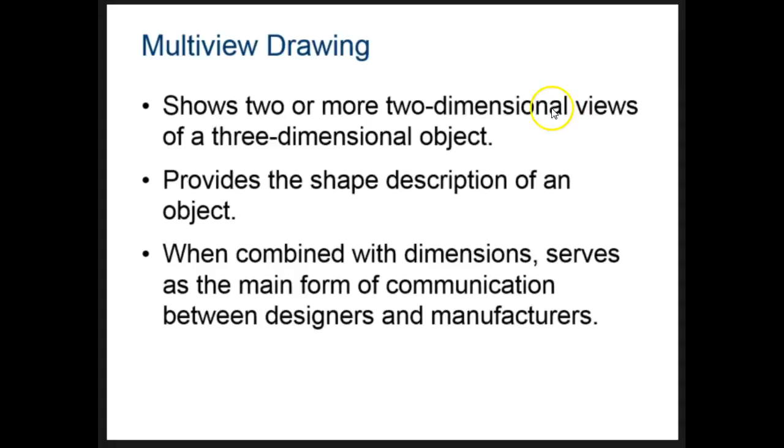This is our video for multi-view sketching, also called orthographic views. Basically, multi-views are showing flat two-dimensional views, like a front view or a top view.

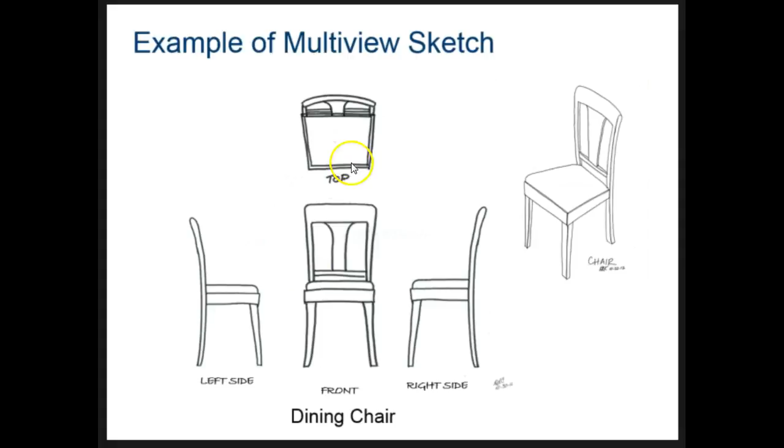Here's an example of a real-life object. This should look like an isometric view to you that we've been working on. These are multi-views: what would the chair look like straight from the front, the top, or a side? One thing I want to point out is, am I learning new information on this side compared to that side? Basically they're just reflections of each other, so I'm not getting any new information. Generally in engineering, we do at most 3 views: front, top, and right side.

So you have a picture that has this on here. This is our isometric view.

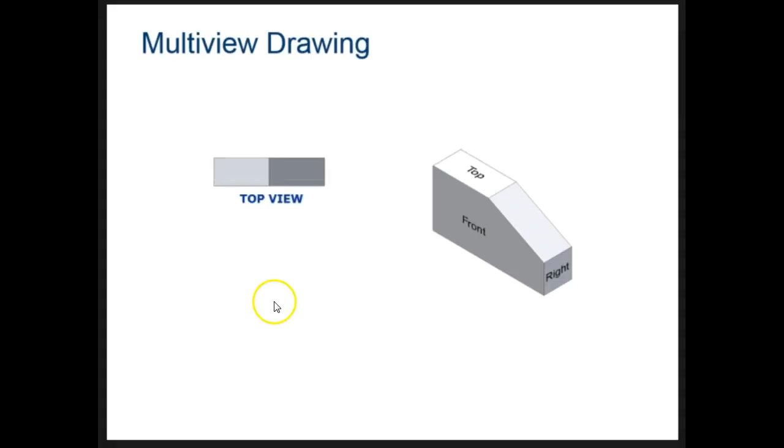This would be where we'd put the top view, and if I take the top view and tilt it down, this is what the front view looks like. If I take the front view and tilt it over, this is what the side view looks like.

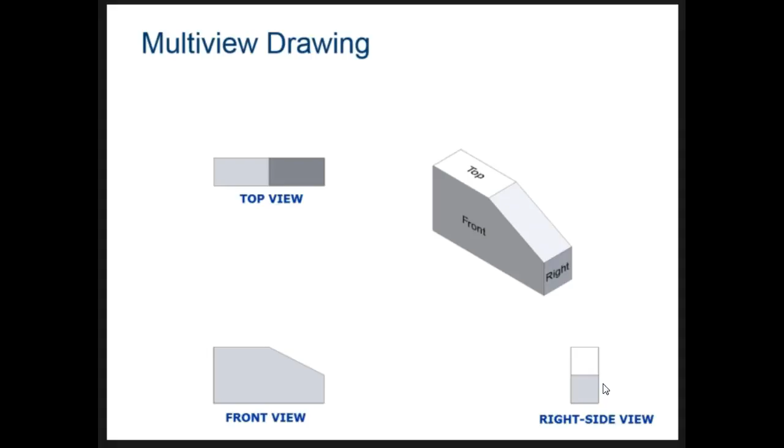Now I want you to, on this slide, label top view, front view, and right side view. Make your labels kind of small so that you'll have room to do more on here. Pause if you need to.

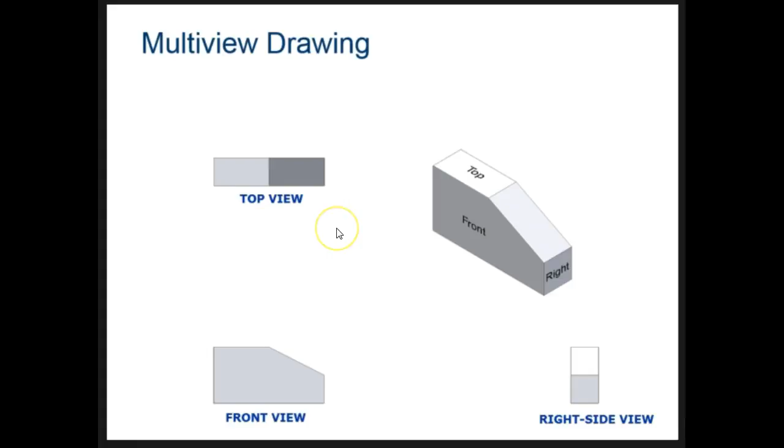Now I want you to get 3 colors, and write depth, width, and height on this side over here. Use the same color you use for height here. Draw these lines in with a ruler and write height here.

Notice that the same height here on the front view is the same height I can see on this side. This line right here also lines up perfectly over there. So we can see the height in the front and the side.

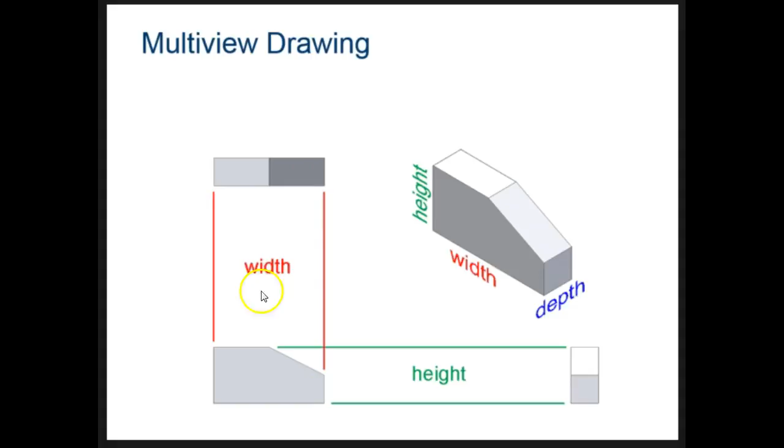Now take your width color and do this one. Draw the lines and label the width in the front and the top. You don't have to draw this little bit here; we'll do this again in a second. But basically the depth can be seen in the top and the side.

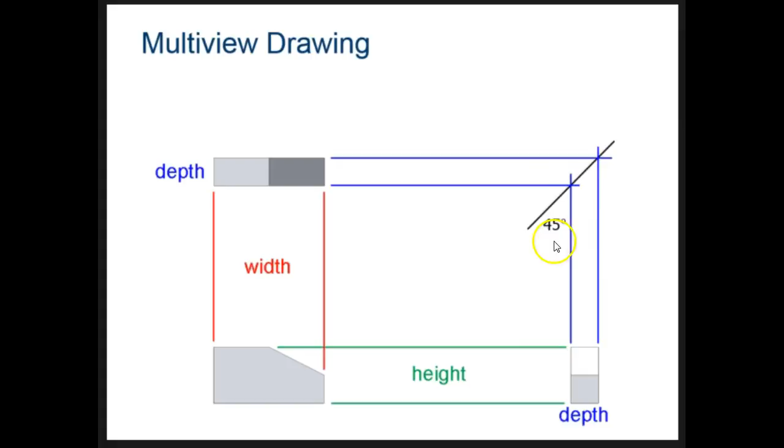And if I take them and project them up, they're going to make a perfect 45-degree angle. Again, you don't have to draw this over the top of our picture right here, but we'll see how this works on the next one.

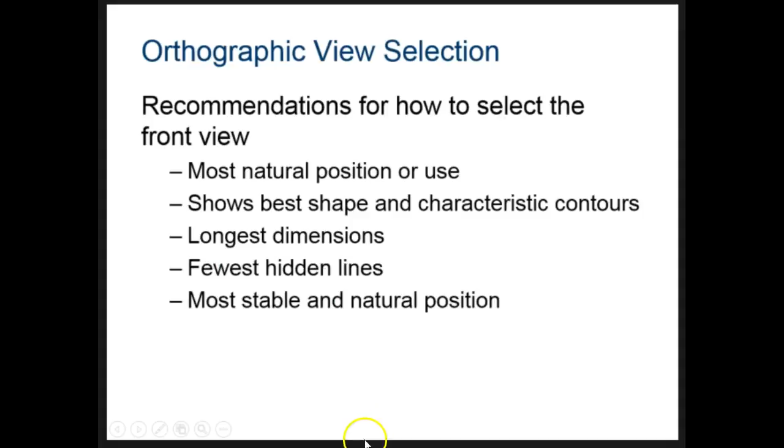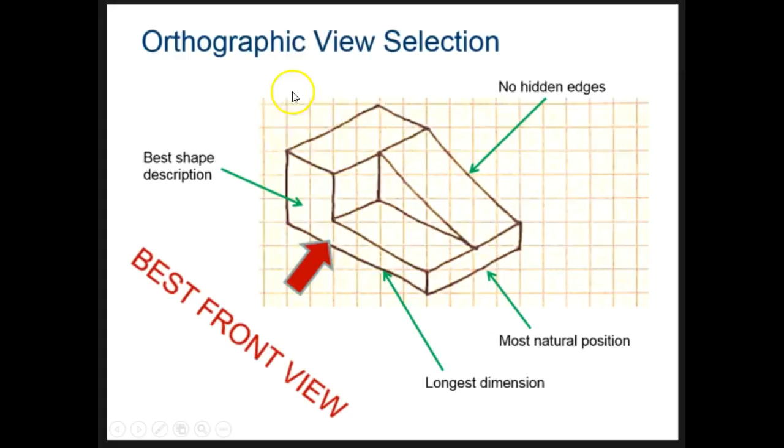So on here, if we were looking at this piece, this would be the best front view from this side, because this side gives us the best shape. There's no hidden edges if we look at it from this side. This is the longest dimension, and this sitting here is the most natural position. If I turned it upside down, it would tend to tip back and forth. So that's the most natural position.

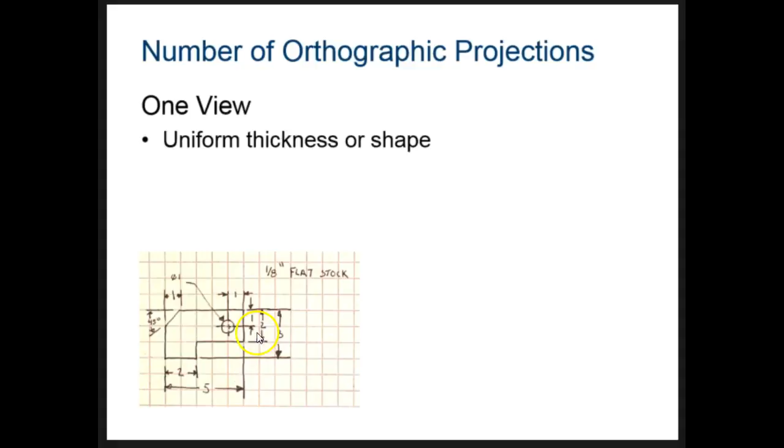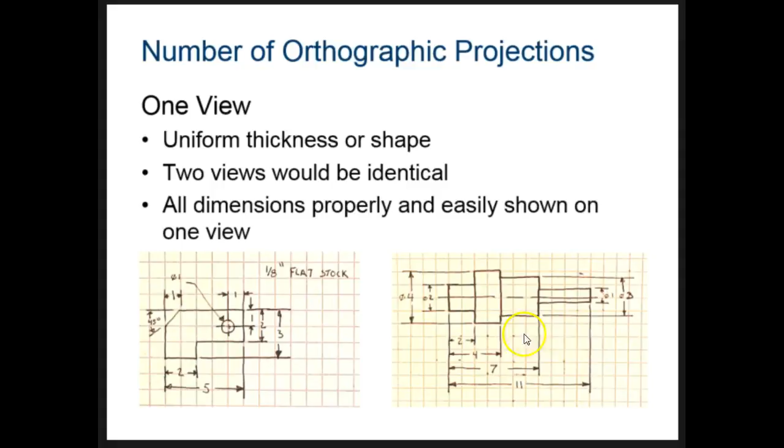If I did here, I would have 2 views that are identical. If I roll a cylinder on the side, it still looks the same. And I can get all the dimensions on 1 view.

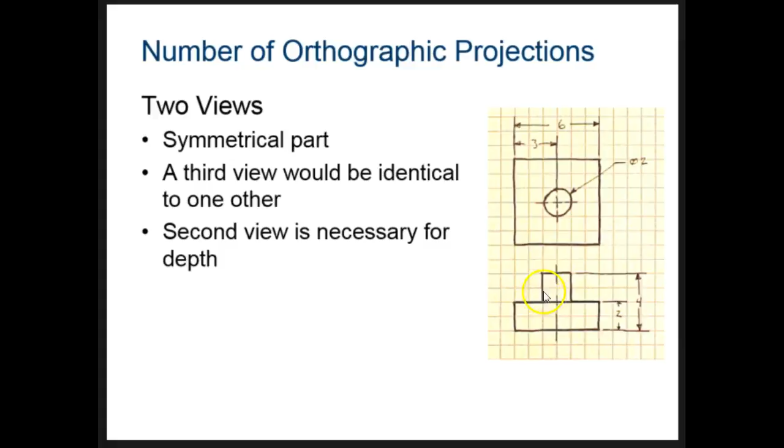Alright, we're going to be drawing this, and I've given you this little guy here. Don't glue this in yet - I'm going to tell you when to glue this in. You're going to be drawing those, so get your ruler out.

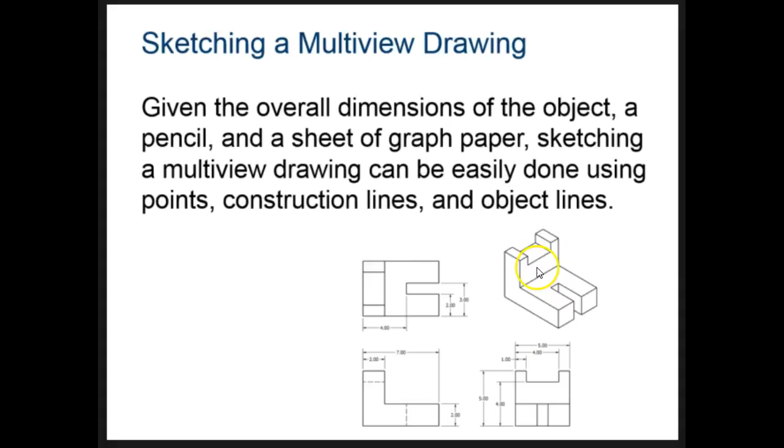Okay, again, don't glue this in yet. Just have this sitting to the side. Draw a line across the bottom of your page with your ruler.

All these lines right now are construction lines, so how should you draw them? That's right, draw them absolutely as light as possible. When you're doing construction lines, you're basically just laying the pencil on the paper and letting the weight of the pencil drag along the line and leave just a little bit of lead on your paper. Extremely light as you can do it and still be able to see it.

Okay, you're going to go up 5 blocks and then do the next line. So make a line on your paper, move up 5 squares and then do another line. Do a vertical line. Move over 8 squares and do a vertical line. Pause the video as you need to.

So far we've got 5 and 8. Move over another 5 here and do this one. And another 5 here and do this one. This is 5 up, and this is 5 up from there. So pause for a minute, get all your lines in there. This is 8. All the other lines are spaced out 5, 5, 5, 5, and 5.

You should end up with a 45-degree line right here. All this should be done with a pencil. All of this should be done lightly. Don't shade these in. This is where we're going to have our front view, our top view, and our right side view in a minute.

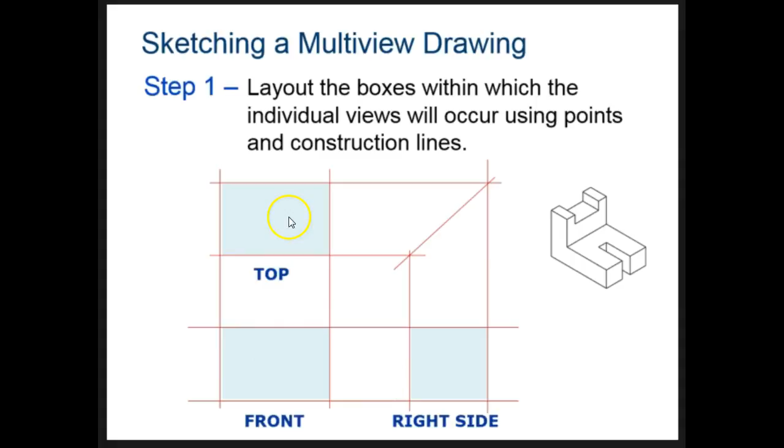Okay, we're going to go through and sketch these in. And I'm going to show you what each one of these lines is so that you can draw it in as we go. This line right here is this flat surface, so this is going to be our front view, which is this side here, and we need to draw this line right here. We're still doing these as construction lines, so they're still very, very light. We're going to use these as guidelines later. Notice that this line right here extends across the front into the side.

This line right here is this vertical portion right here. Notice it extends from the front up to the top. Okay, this is the edge of this little slit, and I can see it in the side. It goes up to the 45 and in the top.

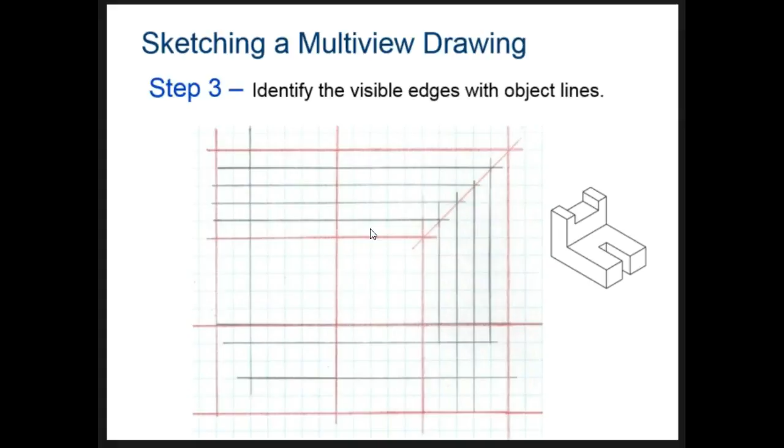Now we're going to start drawing in - you've drawn in all these construction lines they have here. Now we're going to start doing object lines. So what I do is I usually start on the front, and I say, okay, well I can see this line coming down. That's that one. Then from there it goes across the bottom. That's this one. We're now making object lines.

So these are now your dark lines. You should be using a ruler and be really careful that you're getting them right on top of the lines on your graph paper. Across here, up here, and close it in. So I've got this L shape on the front.

Now we're going to do the side view. So we're looking at this side over here. We went across the bottom. Up this side, which I'm going to see this portion too going up. Up this side. Across the top right here. Across the top right there. This part, and that part. So we've got our basic outline. We also need this flat part across here and the little slits right here.

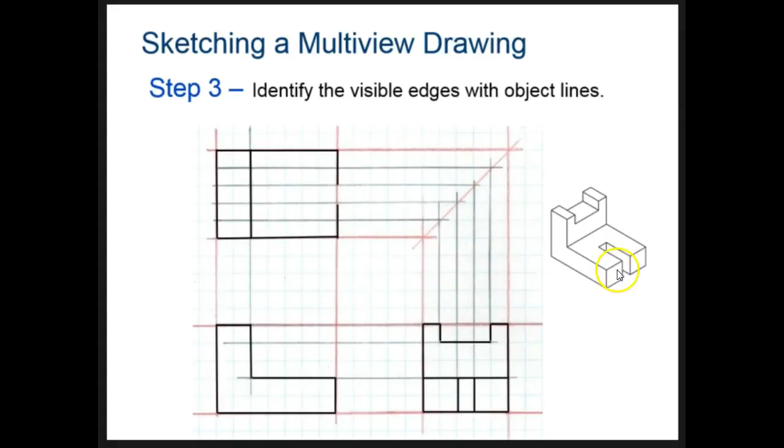This end is done. Now we're going to work on the top view. That's this side here, and the other side. Across here, this end, drawing the little slit. We also can see these little creases right here where it steps down.

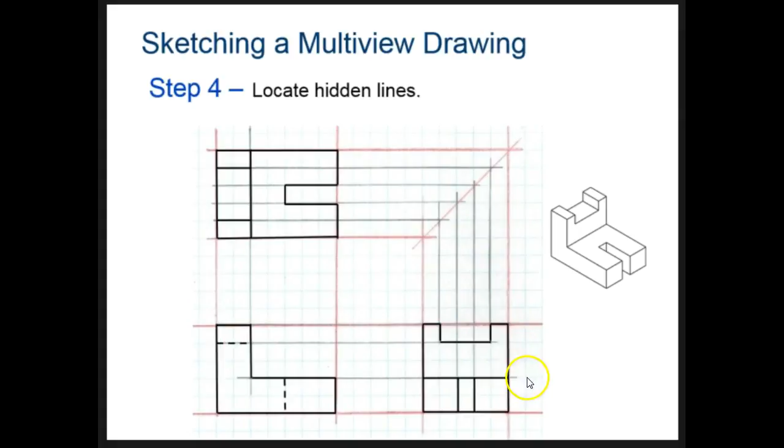Now we need to put in our hidden lines. Where is there going to be a place where there's something in the back that's hidden in the view I'm looking at it? It's just in this one right here. This right here lines up with this over here, and this right here lines up with that. Here's a huge hint: if you've got an object line in another view, it's either going to show up like this line lines up with this one, or if it doesn't line up with anything like this one right here, it's probably a hidden line in the back. There's always going to be one in both views that lines up. If it lines up like that, it lines up over there every time.

Okay, here's just an example of a historical one. You'll notice that this is the front, this happens to be the top. In this historical one, they reverse these two views, but still say basically what we were talking about - side, or front, side, and top.

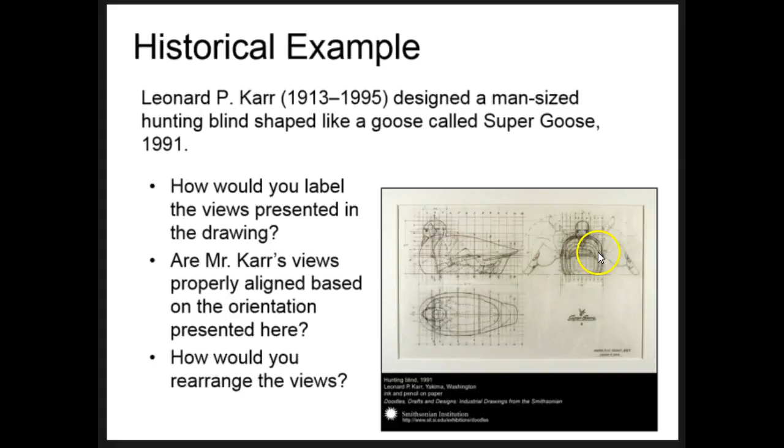Even though this is technically the front of the duck, why is this not the front of our drawing? Hopefully you're telling me because this is the longest view and this one gives the most detail. This one, even though it's the front of the duck, it doesn't give us very much detail about what this would look like.

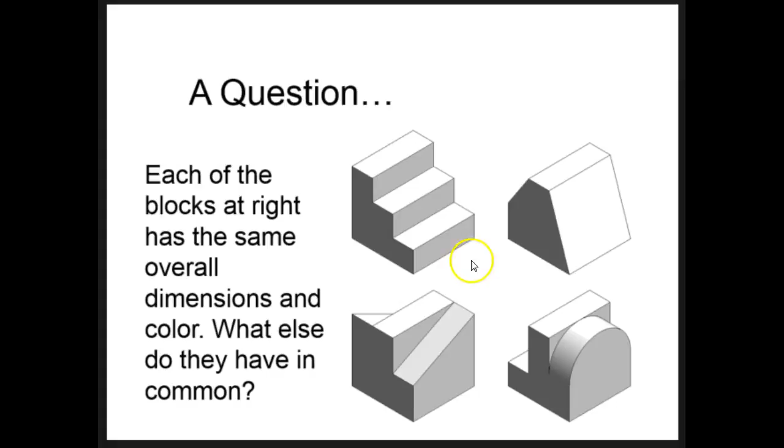And we're going to end with a question. Study these four blocks and think about what the front, top, and sides would look like. What would they have in common? Notice that on the right side, they're all going to be the same dimensions, 3 by 3 on this side here, on their overall dimensions. Anything else that's the same? That's right, the top view on each one would all look exactly the same. Think about it for a minute, and then you're done.